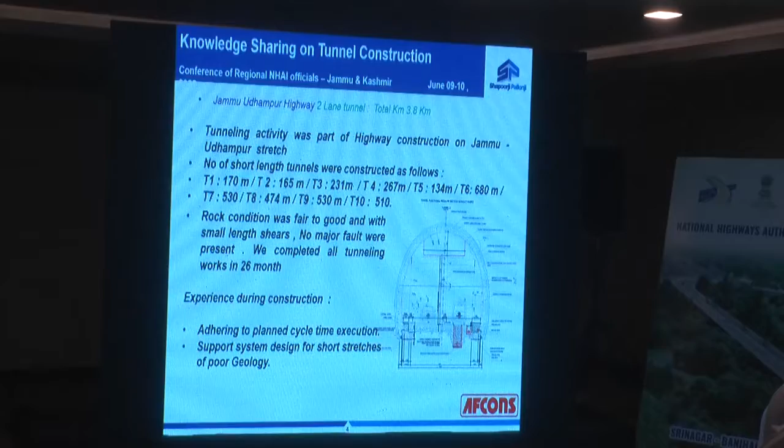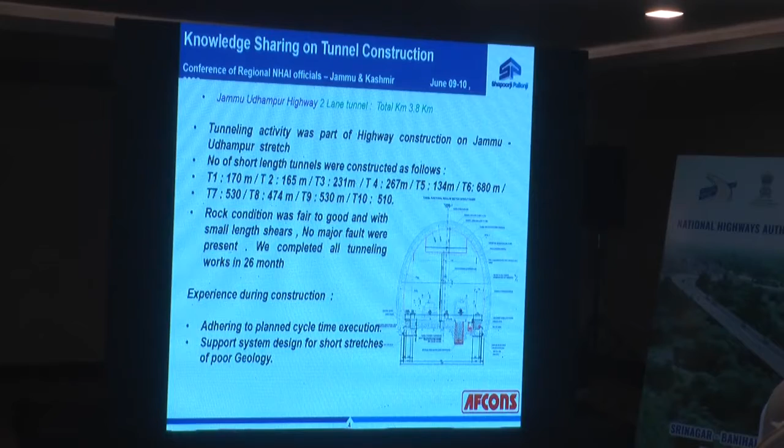Because the team which had come at that time for construction was from a heterogeneous background - somewhere from hydro underground construction, somewhere from new techniques getting adopted into the industry. So merging their synergies and bringing them to one particular wavelength also became a challenge. And that is the reason, in some areas, alternate solutions were being proposed by the execution team - that sir, this can be done to handle this problem, or this can be done for that - and we were wasting time on those small issues where too many suggestions were coming, and that's the reason repetitiveness was not coming.

Once those problems were ironed out, we had a pretty good scenario of a synergized team, and then things were completed. The second aspect was the support system designed for short stretches of poor geology. We all talk about longer shears or longer fault zones, but in a tunnel of 100 meters, there will not be a big fault - there will be a small patch of 3, 5, or 8 meters.

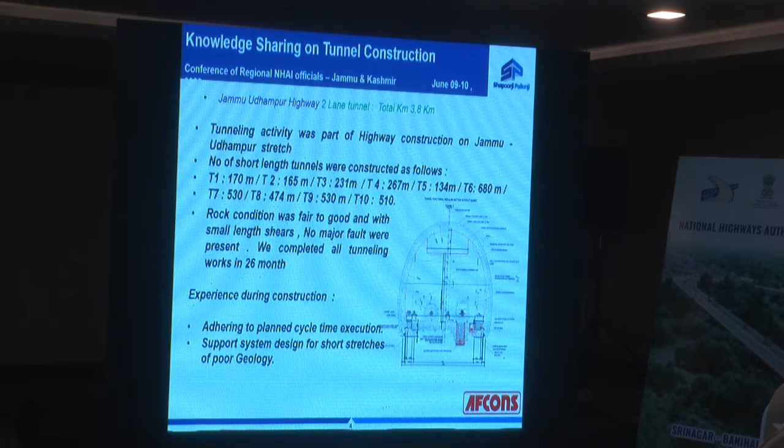To do mapping - today we map a face block which says it's poor rock, and by the time you take 2 more blasts, it suddenly becomes good rock. So what kind of support needs to be adopted for the already executed 5-meter stretch, or what support needs to be adopted going forward? This also became a point of debate between the consultant and our people, and it was one area where we needed a standardized design approach - for smaller fault zones, what kind of support structures we need to provide, and for good rock, what kind of support, because for a longer stretch we will definitely have a good systematic support designed.

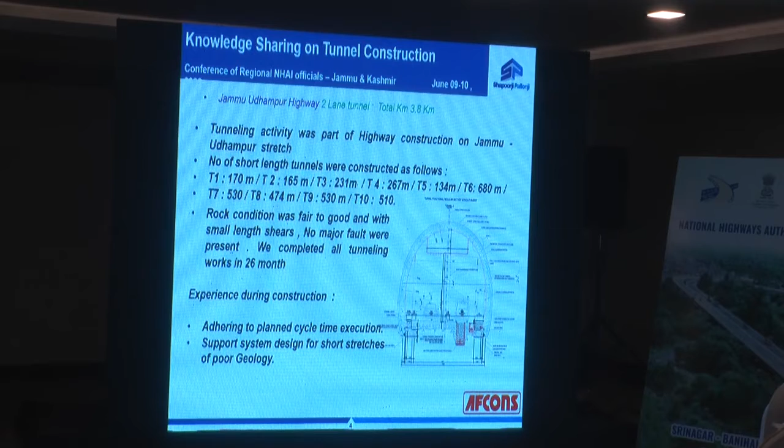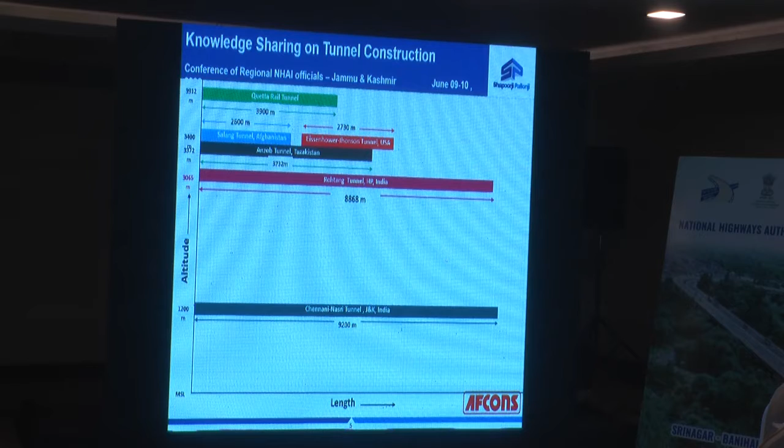Now coming to Atal Tunnel - one of the longest tunnels in Asia, above 3000 meter elevation. Atal Tunnel is at elevation of 3065 meters and it's 8.86 kilometers. The comparable tunnels are basically Chenani Nasri, which is at a far lower elevation of 1200 meters, and three other rail tunnels - one in Afghanistan, one in the USA, and the Quetta rail tunnel in Pakistan, which is at elevation of 3,900 meters and is 3.9 kilometers.

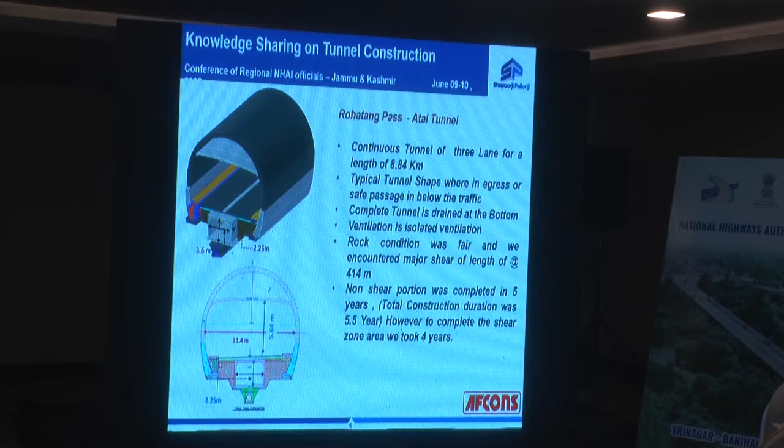Now coming to Rohtang Pass, you can look at the geometry of the tunnel. It's a 3-lane tunnel - continuous, considering 3-lane in one direction, it's a 3-lane one-direction tunnel at 8.84 kilometers, so it's actually 1.5 lanes in each direction of traffic. The tunnel shape has egress at the bottom - a small sectional area of 3.6 meter by 2.25 meter, and this section is used as the egress portion.

Every 100 meters there is a door available on the side of the tunnel which goes below, connecting that section to the egress below, and through this people can move along the tunnel through rescue chambers. These rescue chambers are also constructed at certain intervals so that people can be moved to a rescue zone, and hazards from critical accident situations can be avoided.

The complete tunnel is drained at the bottom and uses an isolated ventilation system. At the top, there is a slab provided, and all ventilation equipment is mounted above the slab, so all the fumes and bad air are sucked in at the bottom, driven through jet fans to a location, and taken out of the tunnel through the side.

This was the method adopted during construction of a length of around 414 meters. The non-shear portion was completed in 5 years, with an anticipated total construction duration of 5.5 years. However, to complete this shear zone and pass through these 414 meters, we took almost 4 years. The learnings: why did it take so much time?

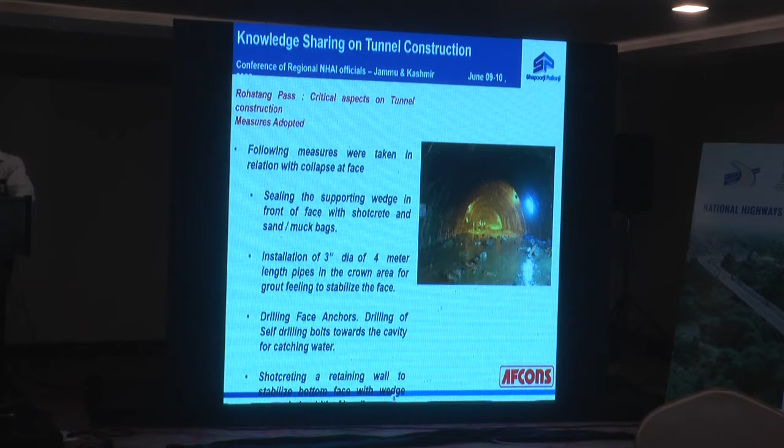Then came the drilling phase, where anchors were placed, self drilling bolts were drilled towards the cavity, and shotcreting and a retaining wall were also stabilized. Then came the final method which we adopted.

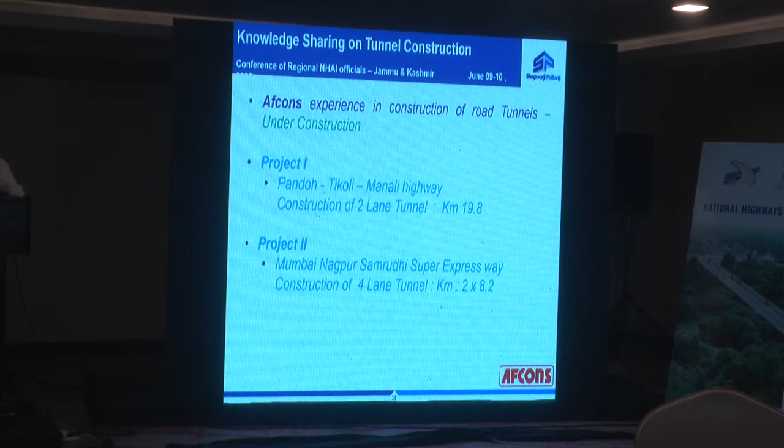Another experience of Afcons - these are two projects currently under construction. One is the Pandoh-Tikoli Manali Highway, involving construction of 2-lane tunnels totaling 19.8 kilometers, and the second is the Mumbai-Nagpur Samruddhi Super Expressway, involving construction of 4-lane tunnels of 8.2 kilometers across 2 tunnels.

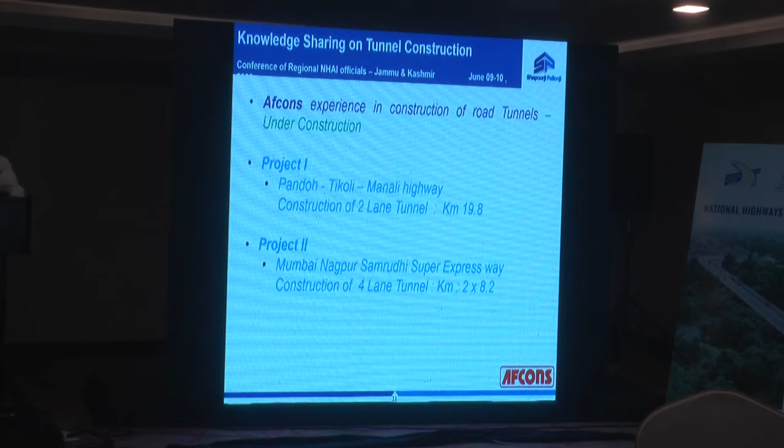Looking at the Pandoh-Tikoli project, we constructed many stretches of tunnel. There are pairs of tunnels and certain single tunnels of 2-lane distinction. The total excavated length of tunnels completed is 19.8 kilometers.

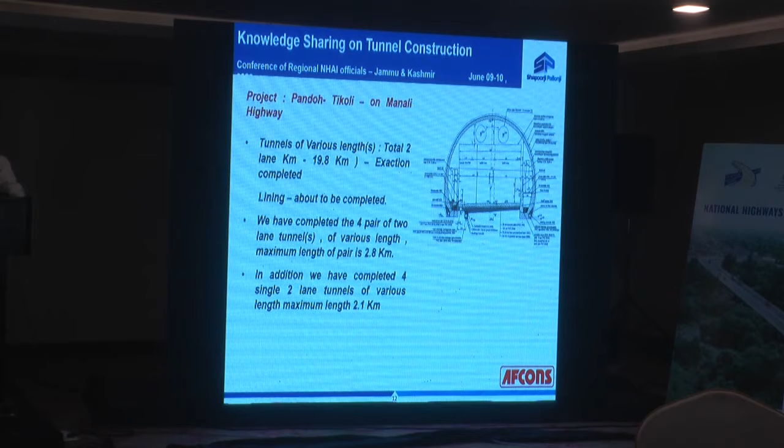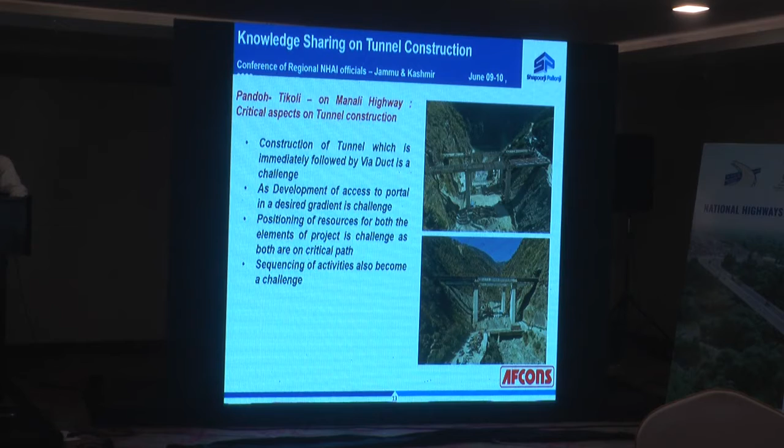A key issue in this tunneling activity is that construction of a tunnel immediately followed by a viaduct is a major challenge, because developing access road at the desired gradient becomes difficult - we need space for viaduct activities as well as for the road. Solutions include enlarging the length of the viaduct or choosing a location that avoids this interference by acquiring additional land outside the ROW boundary, so we can ease these problems and move ahead faster.

The next project has 2 tunnels of 7.7 kilometer length, with a base width of around 21.32 meters and cross-sectional area of 156 square meters - a large cross-sectional area from an executional perspective.

In this project, we have a cut and cover section of around 270 meters, and another cut and cover section which is not concreted but is a shed portion, with a length of around 400 meters.

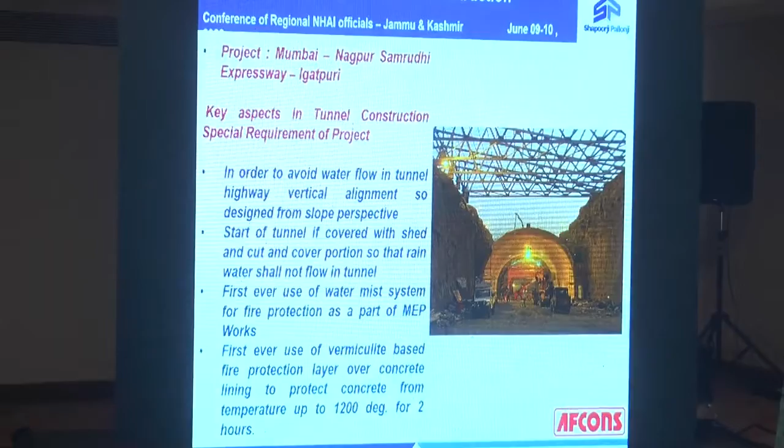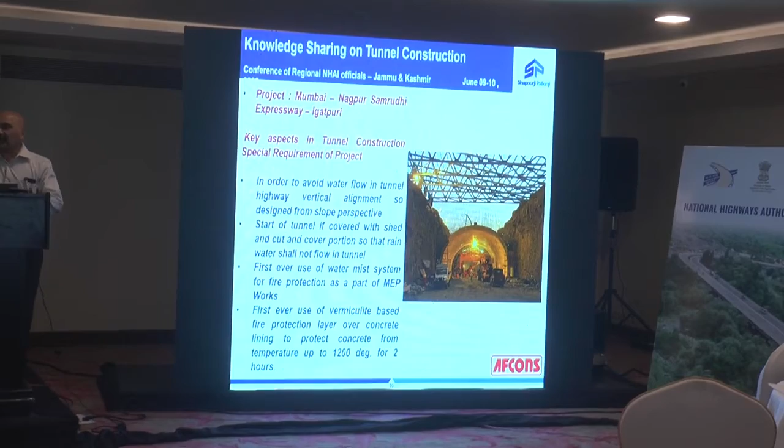Now the other dimension - why this shed portion? Somebody will have a question why this shed portion was proposed for this kind of project. The objective of this shed tunnel came from the fact that during rainy season this whole area gets blocked by a dense fog.

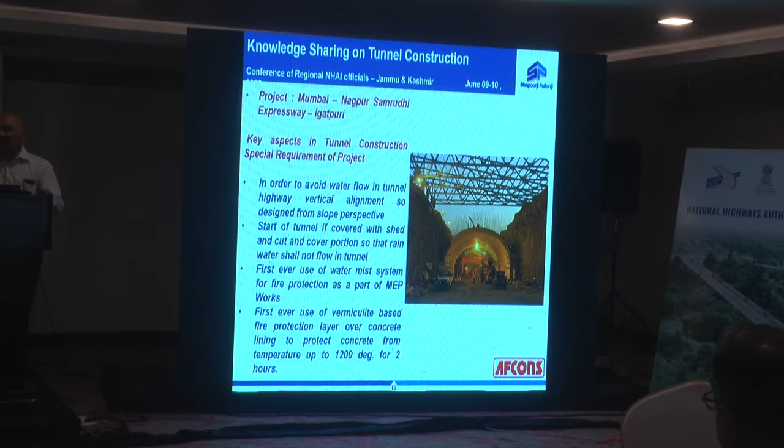So we have to design the illumination system in such a way that during the transient length of certain meters you have an illuminated road, then you enter the shaded portion so the light remains consistent, and then you enter the tunnel where the light intensity is such that you will not feel the transition from the fog zone to the tunnel. That is the reason these design parameters were taken care of and proposed.

For smoke density of more than 150 megawatt, bringing it down to a level of around 40 to 45 megawatt - a high pressure water mist system is a good alternative which can be used for controlling fire inside the tunnel, and especially for long tunnels that is mandatory.

The second one is as per the contractual requirement and as per technical evaluation. In case of fire, the fire will generate heat, and that heat might have an impact on the concrete lining inside the tunnel.

You have primary support installed, you have progressed, but then the primary support was not adequate, or there had been a dynamic stress release because of certain movements inside the mountain, and then you have a squeezing of the tunnel. The original tunnel was of X diameter and you have reduced diameter. So reworking for such activities becomes a challenge, because you have to restore - you have to take out the original support, and it's a hell of an activity to restore a tunnel.

So we need to have these kinds of studies and predictions analyzed through various educational institutions, IITs and others, so that we have proper inputs on mapping of those scenarios and then move in with appropriate measures during construction of tunnels.